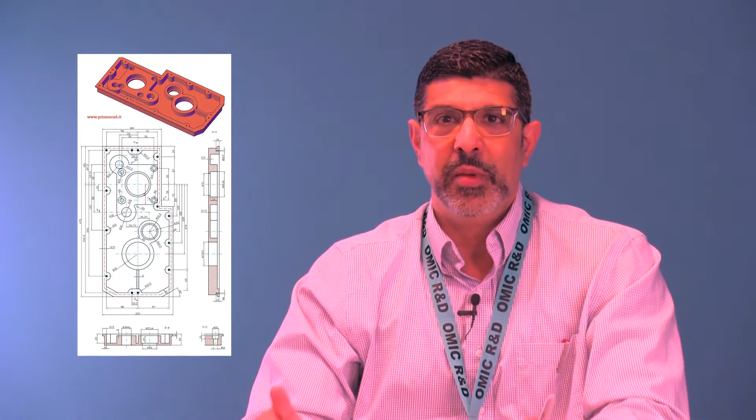Now, a blueprint is basically the output of a CAD model on a single piece of paper. It can have various degrees of complexity depending on what you're trying to make. Are you trying to make a simple toy or a hobby part, or are you trying to make an aerospace component or something used in surgeries or in automotive?

So that carries with it things like tolerances on your dimensions. How precise do you want something? What materials are to be used? The dates at which it needs to be signed off and produced. The actual sign off of the blueprint to formalize it. It could even have a bill of materials, meaning all the components you need to assemble this item, and also things like part numbers, so that you really formalize the item you're trying to manufacture.

From here on, you're going to observe the OMIC team try to create these hammers. One of the first things you're going to see is a group of OMIC employees get in a room and conceptualize an original idea as a team, and they're going to do whiteboarding.

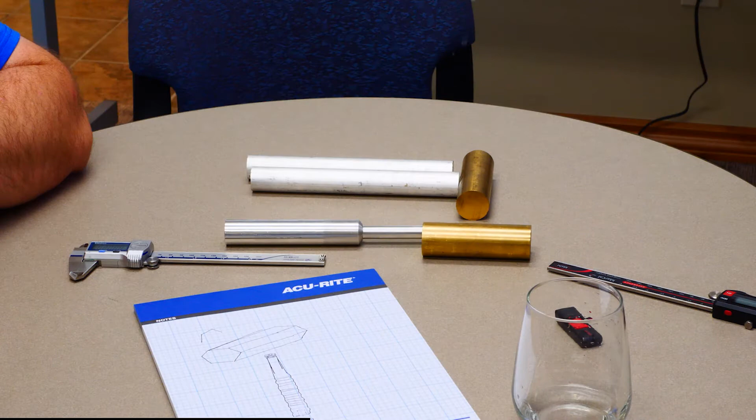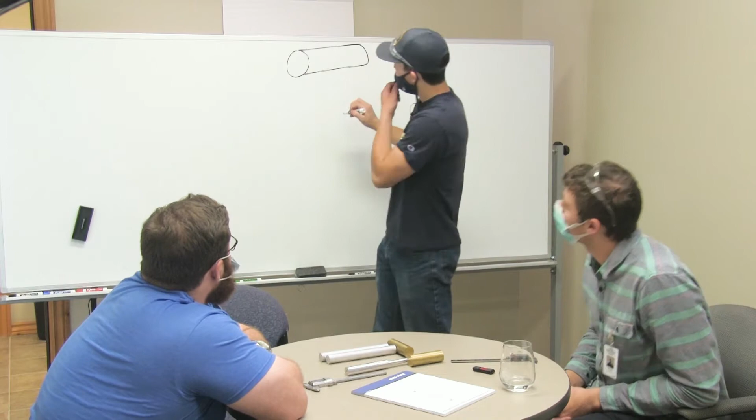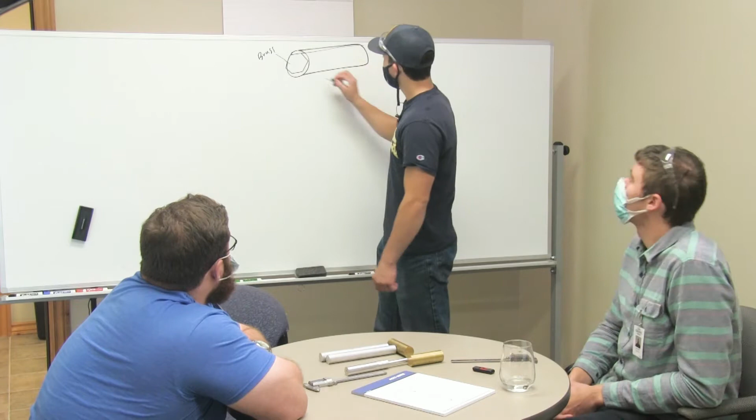This rough sketch here, but let's draw it out a little bit more on the whiteboard so we can turn it into a blueprint. So what were we thinking for the head? Probably out of brass. Yeah, we're going to make it out of brass so it's non-marring. So we're going to start with a piece of brass stock, and then we will make a hexagon out of it. So that will be our final part. That'll work. So kind of just a straight cylindrical rod for the handle itself. The design continues to be refined.

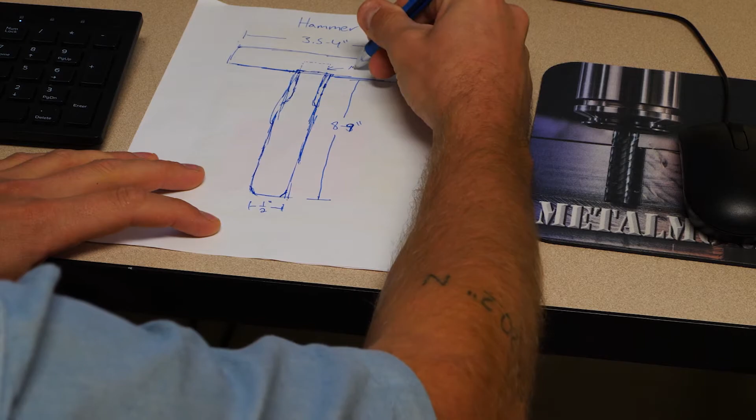Next, we're going to put this design into a computer system commonly known as CAD, or computer aided design. Here, the designer can turn the object around, refine it, really take a close look at it. In some advanced systems, the user can even incorporate material properties like density and thermal conductivity. But in this case, we're implementing threads and refining our diameters.

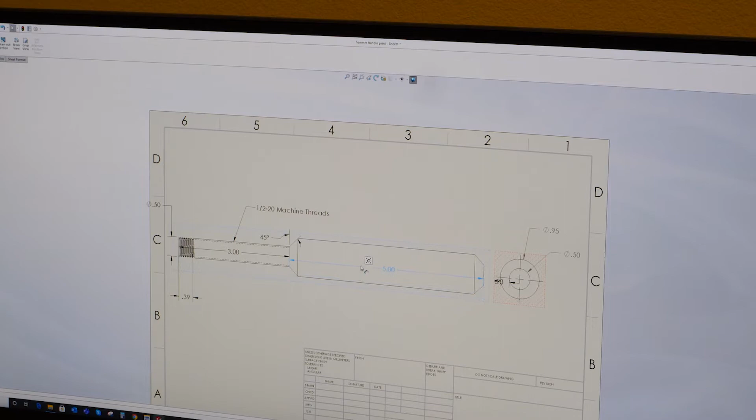Once the designer feels comfortable with the CAD model, it can then automatically output a blueprint design, which is a formalized 2D image of the design. We have various orientations: top view, side view, and even an oblique view.

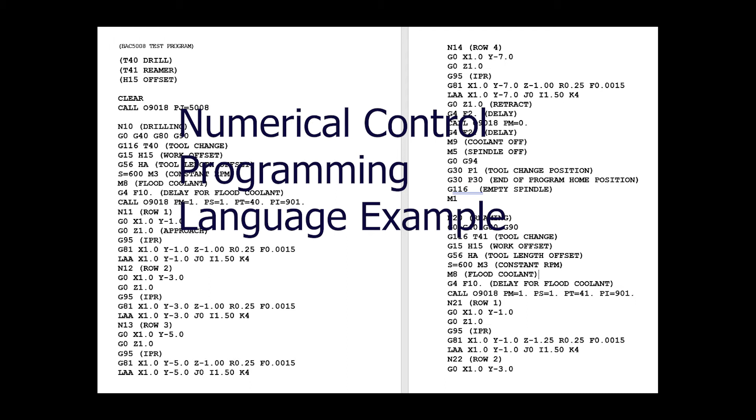If needed, we can now output an NC program, which is how the design system talks to a machine tool. Here, on some of the more advanced design software, we can even simulate the machining of the design.

Now that we have the initial design finalized electronically and a blueprint created, and some basic manufacturing simulations may even be run, the team now comes together to talk about actually making it. They talk about tools, fixtures, and machines.

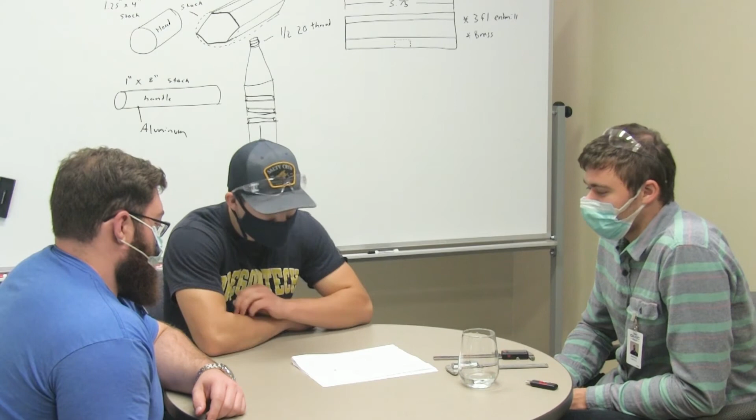Okay, so here are the CAD drawings we came up with. What kind of tools do you think we're going to use to do the brass? Well, we're going to start with a 1 1/4 brass stock, so we shouldn't need to do any roughing on the external diameter of the brass.

So in terms of machining, we're just going to cut this groove with, I guess, either a 5/8 end mill or smaller, to get a 5/8 slot, and then we'll drill it and thread it with a tap.

We will need to use the lathe to face off the ends, though, to get it to the correct length. We will, and cut these, and then we'll do the slight chamfers on there. And then that's all we'll need for the lathe.

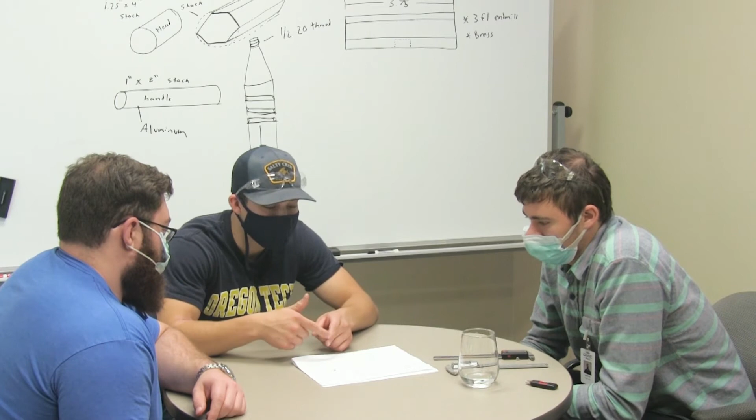Then after that, we'll go over to the mill. And how do you want to approach the threading in the hole? We will cut our slot, then switch to, I think you drill with a 29/64 drill bit for a 1/2 thread. That's correct. So we'll drill however deep we decided.

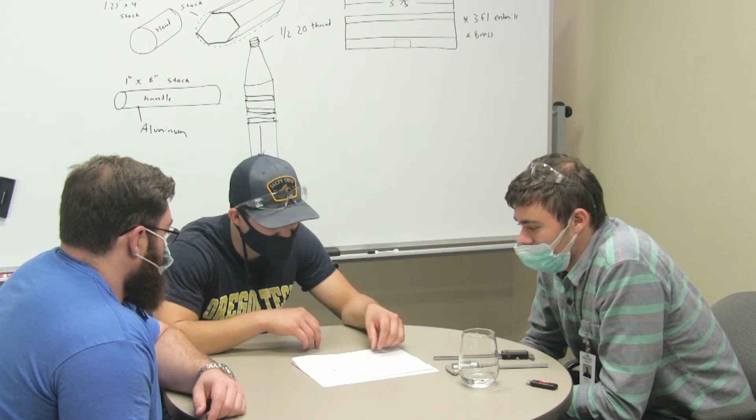And now let's take a look at what we want to do for the handle. So this is going to be aluminum, naturally, and there's going to be a whole lot. This is going to be mostly on the lathe, right? Do we need to do anything on the mill for this?

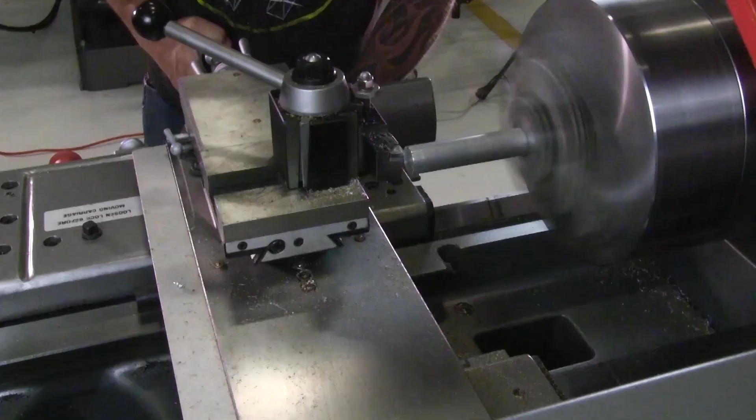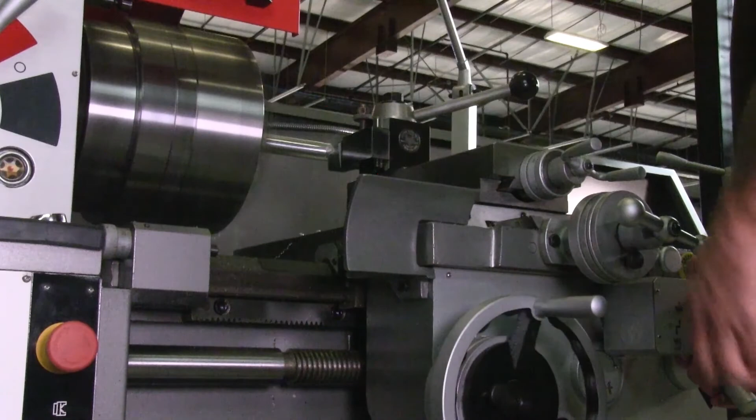The operation you're going to observe now is called turning. It's done on a machine known as the lathe. At the simplest level, an old-fashioned manual pencil sharpener is basically a lathe: you take the workpiece and rotate it at a high speed while the blade remains constant. The big thing to take away from lathe operations is that they are classically used for machining cylindrical objects.

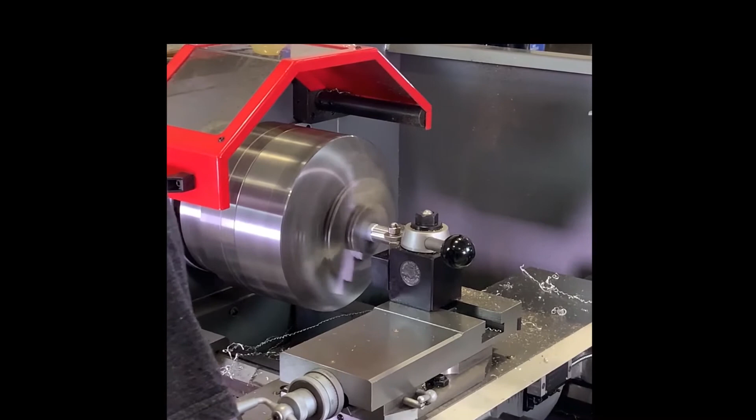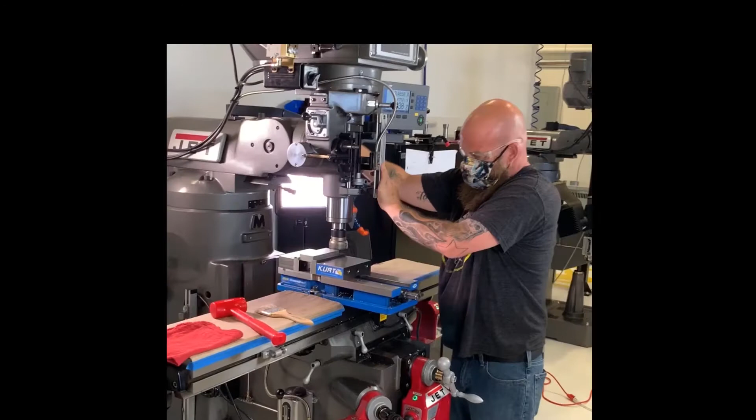Next, you're going to observe another classical machining operation known as milling. At the simplest level, a lawnmower is a milling machine, where the blades turn at a very high RPM, and the workpiece, or the lawnmower, is fed across the grass slower. Milling is predominantly used for machining flat surfaces and/or drilling holes.

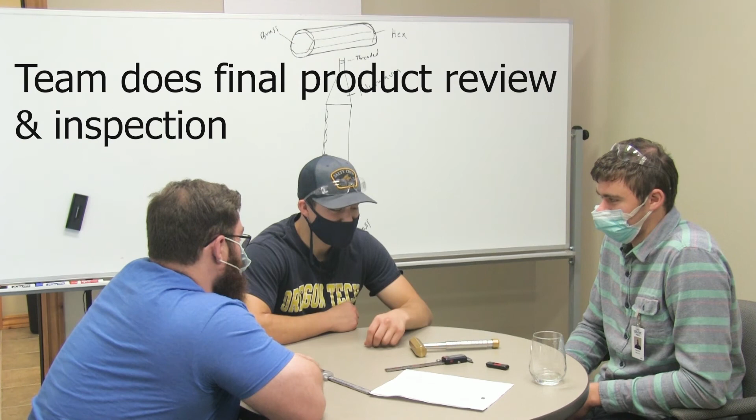So to quickly review all the steps we've just witnessed: we started with somebody having an idea or a concept, and then they materialized that concept by putting it on paper, creating a draft or a drawing. It was reviewed by a team of co-workers, further refined and improved, and even finalized to some extent, and then that draft was put into a CAD system to create a 3D model.

And from that 3D model, things got a little more formalized, people started to approve it, and then that became a blueprint drawing. A blueprint carries with it a lot of details and different degrees of difficulty depending on what you're trying to make. And then that blueprint was the starting point of conversation with various teams responsible for producibility of that concept.